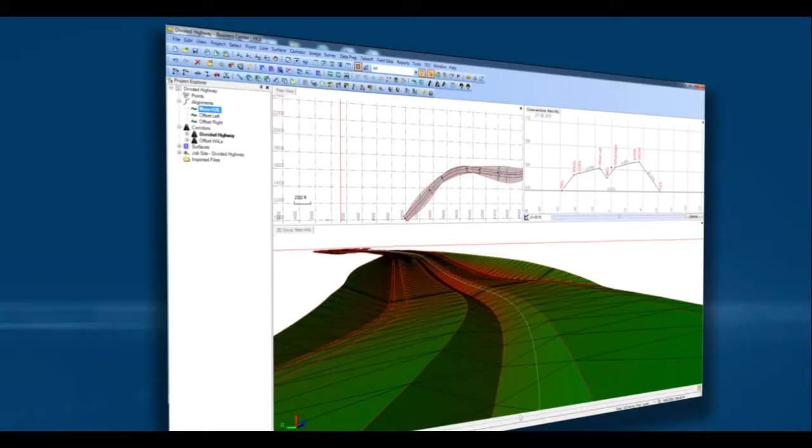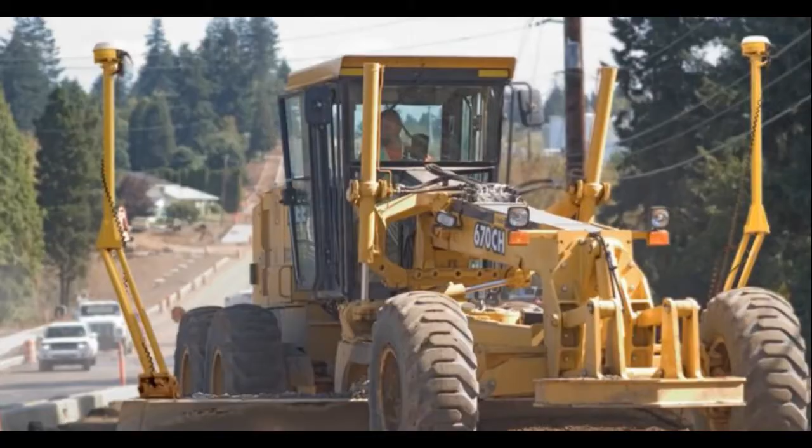A common theme we hear from companies that utilize Business Center is Business Center can enter linear data so quickly and accurately from so many different sets of data, it gives their estimators more time to figure out how to plan and then bid the job.

Business Center's Corridor Mass Haul doesn't just give a company inventory reports with accumulated material running down the alignment and mass haul diagrams that show where the balance points are along the alignment. Business Center greatly expands your bidding and project planning several steps further by giving you the capability to designate haul roads with costs, waste and borrow sites with costs and capacities.

Also, as many user-defined haul ranges for different types of equipment that can be reported by cut and fill zones by machine's haul range in Excel. Business Center gives you the ability to insert barriers along the alignment that can't be crossed when hauling. Finally, stunning visualization tools such as color-coded haul ranges by machines displayed logically in Google Earth.

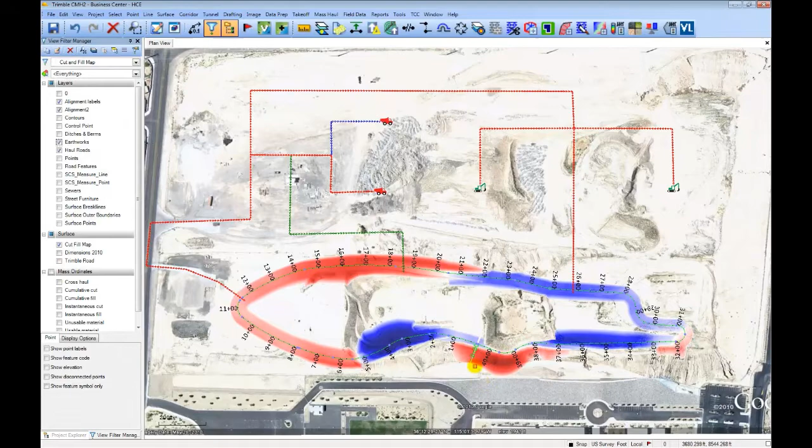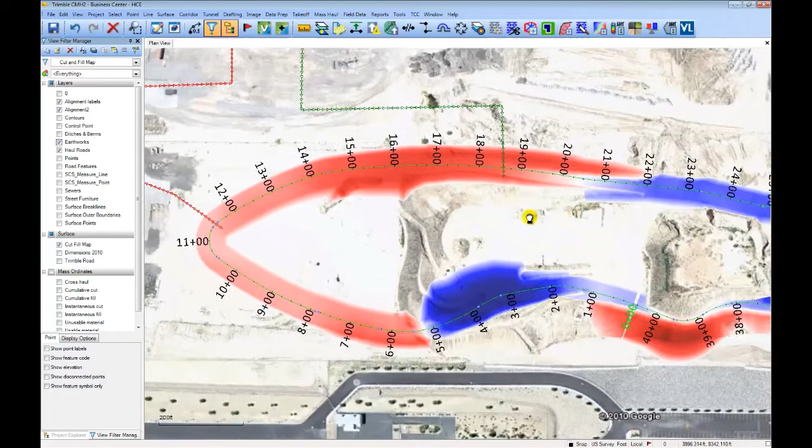Many of you will visit this project at Trimble Dimensions in Las Vegas, Nevada. Displaying the surface-based cut and fill map, you can see that the project starts off with cut on one side and fill on the other. As we move down the alignment, we start to run into all fill at Station 1 and fill all the way to Station 5. Then we transition to cut and need to fill again around Station 21.

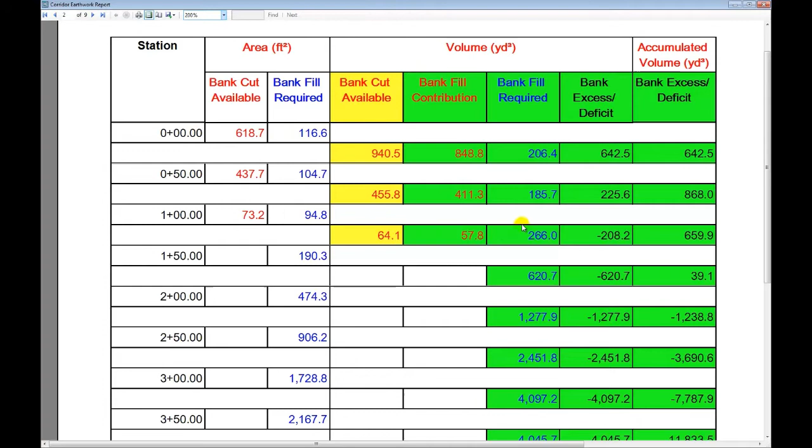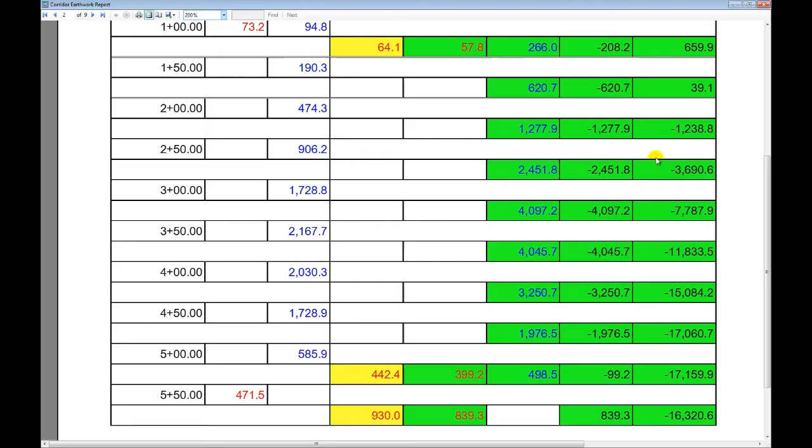If we run the Corridor Earthwork report, we should see just that. From the start to Station 1, we have both cut and fill. Station 1 plus 50 until 4 plus 50 is all fill. Looking at the accumulated material to the right, you should be able to picture what the mass haul diagram might look like. Next, let's take a look at the numbers visually by generating the mass haul diagram.

We are looking at the alignment running horizontally across the screen and the quantity of material vertically. The red line is the cumulative volume of cut and the blue the fill as we go down the alignment. From the cut and fill map, the diagram verifies that we start off with both cut and fill and quickly run into all fill. See how the blue line jumps straight up and the cut line stays flat?

The green line is the aggregate of the cut and fill. If the green line is below the alignment, we are short material. When it intersects the alignment, that is where we have a balance. You notice the aggregate line stops abruptly right here at Station 22. The symbol means we have a barrier, which happens to be a river, so no more material can cross at this station. So what we need to do is haul around the barrier using haul roads.

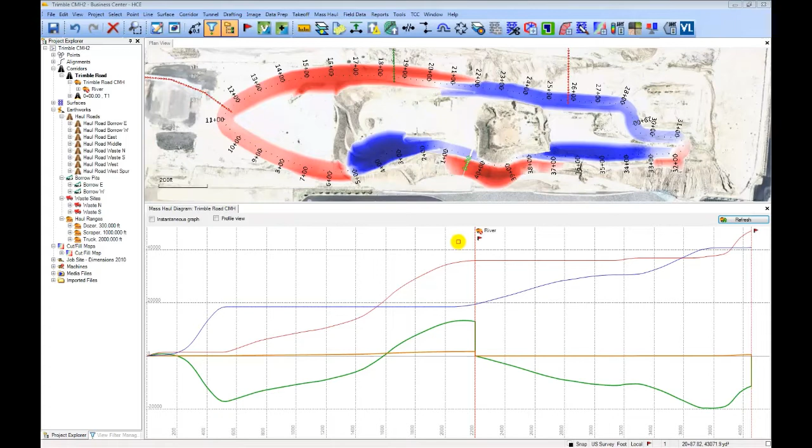This is where an aerial image of the project's location comes in. On the other side of the barrier, we are short material. So our job is to find borrow pits and determine which ones or one is the most economical to bring material from. So what we have done is draw in haul roads using the Google Earth image as our backdrop. If you are fortunate enough to have roads in an electronic format, you could simply convert them to haul roads.

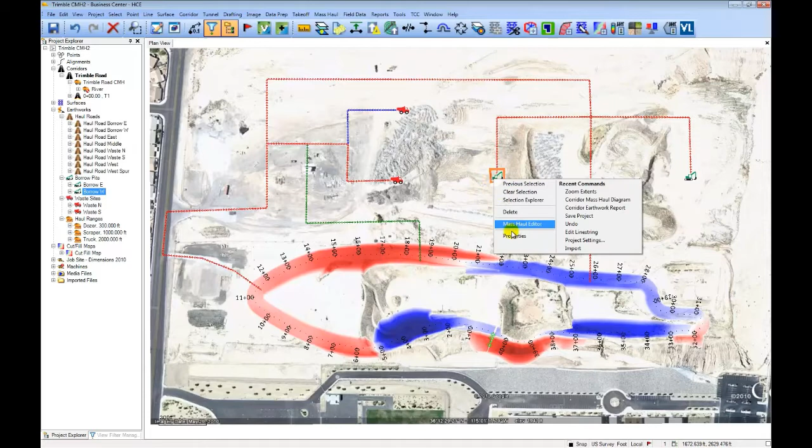We name the haul roads and put in a cost to haul material down the road. This is something you're probably already doing in your current bidding and planning methodology. Business Center just automates this process for you. Then, we determine where we can put an earthwork site. An earthwork site is simply a waste or a borrow pit. You visually see red dump trucks for waste and green excavators for borrow sites. We figure a cost that is associated with the earthwork sites and the capacity that we could dump or borrow.

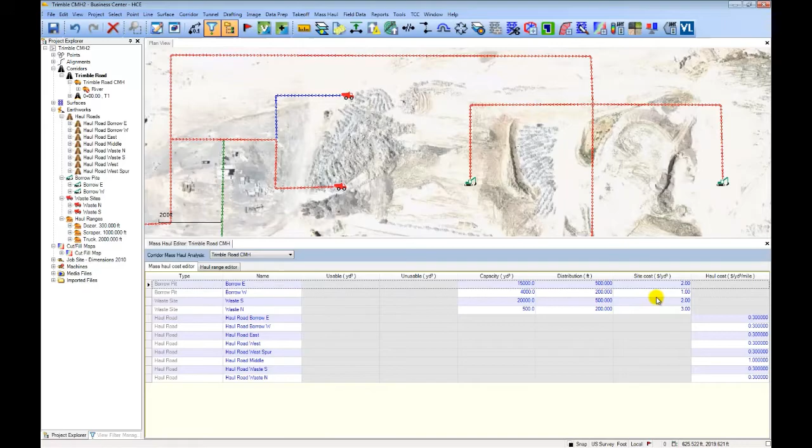As I mentioned earlier, Business Center can enter the data so quickly you and your team can spend more time doing what I'm showing you here. For a job like this one, there may be more than several places to borrow and dump material. So you and your team can locate all potential scenarios, put an estimated cost associated to them, and let Business Center determine the most efficient and cost-effective way to balance and build the job. From the Mass Haul Cost Editor, you can change assumptions on the haul roads and earthwork sites to quickly see the outcome. Back to the mass haul diagram now.

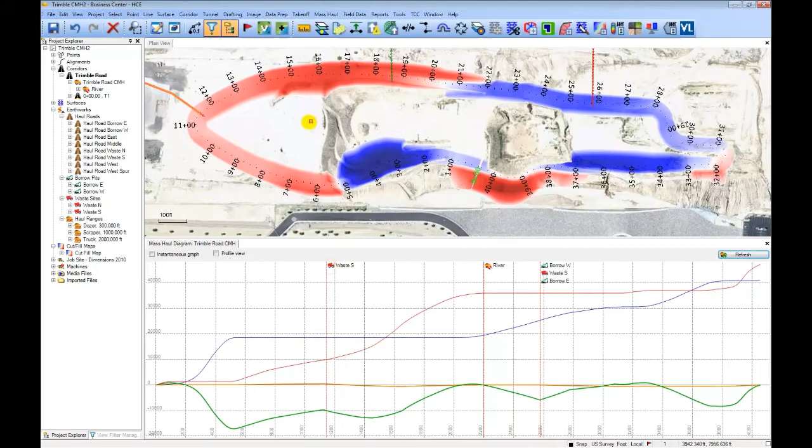I simply hit the refresh button to see how Business Center optimized the job. Because of the barrier, we were long material. Since we located proposed waste sites, we could see Business Center determined it was more cost-effective to waste material at this location than haul it around using the haul roads. You could see from the green aggregate line that we have two areas that balance on this side of the river. If we click on the red dump truck at the top of the mass haul diagram, we can graphically see in the plan view where the material is being hauled to.

On the other side of the river, we could see we have 1, 2, 3 balances. What did Business Center do to determine this? We can see that we were using 2 of the borrow pits to make the site balance. Really nice to see graphically on screen when we are planning on how to bid and build the job. We aren't quite done yet.

Now that we have balanced the job, what types of equipment are we going to need to build the job? Business Center allows you and your team to put in as many haul ranges as you need. For this project, we estimated a dozer could push up to 300 feet, a scraper up to 1,000, and an off-road truck can haul up to 2,000 feet.

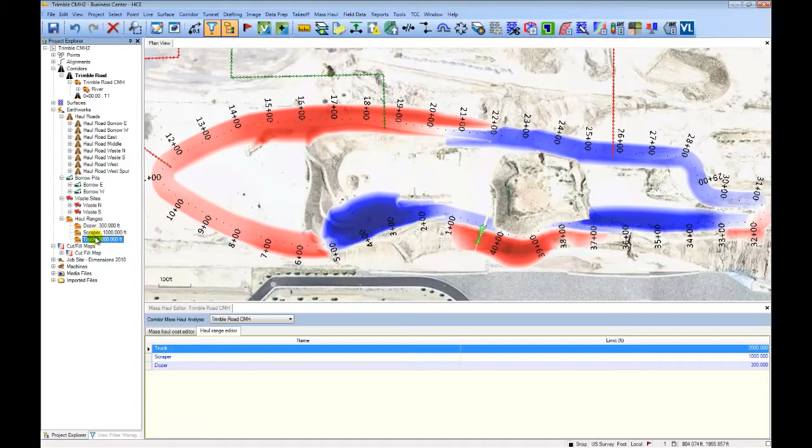If it is a really long project, you might want to know truck hauls from 5,000 to 10,000 feet, for instance. Once again, the Haul Range Editor lets you quickly change your ranges to see how it affects the mass haul diagram. Once we run Business Center's balance line report, a couple of things happen.

First, you notice how the cut and fill map changed. Now, it is your mass haul diagram graphically displayed in the plan view. Red for cut stations, and blue for fill stations. Second, in the mass haul diagram, we see graphically the equipment needed in each balance.

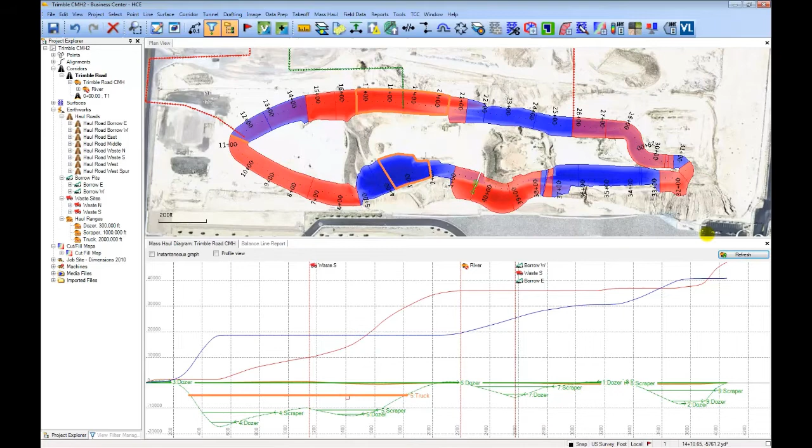If we click on this truck haul, we see graphically from where the material is being cut in the plan view to where the material is being hauled. If we look at the truck's properties, we could see the cut and fill station ranges, the average distance of 1,515 feet, and the amount of material, 9,723 yards.

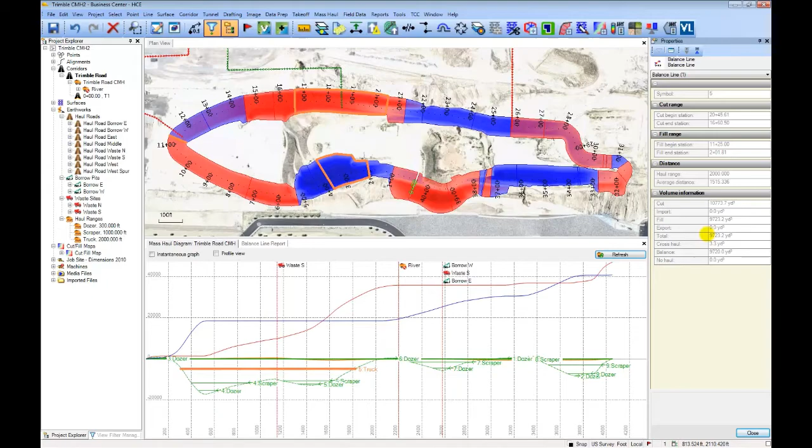Next, we will show you all of the information for all of the hauls by equipment in the balance line report in Excel. In the balance line report in Excel, we see all 9 balances. In the balances, we see the range of cut and fill stations, and then broken down for the type of equipment needed inside the ranges.

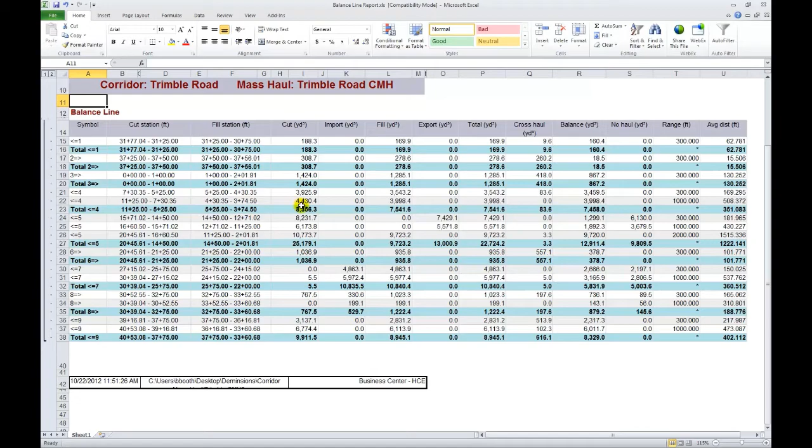In balance 4, we see that we are cutting 3,926 yards and filling 3,543 yards between these stations. 83 yards is being cross-hauled from one side to the other. Some people call this in-station dirt. The average haul for this dozer is 169 feet. The scraper is moving 4,430 yards at an average of 508 feet.

The last report we will run before reviewing the job in Google Earth is the Corridor Mass Haul Report. Once again in Excel, the Corridor Mass Haul Report breaks the job down by source and destination. Source being the cut and borrow operations, and the destination being the fill and waste operations.

For the source, we are cutting 47,178 yards and borrowing from the pits 11,365 yards. The haul cost to get it from the pit costs this, and to move the material on site is this, for a total of $19,603. We are filling 40,942 yards on site and wasting 15,241 yards.

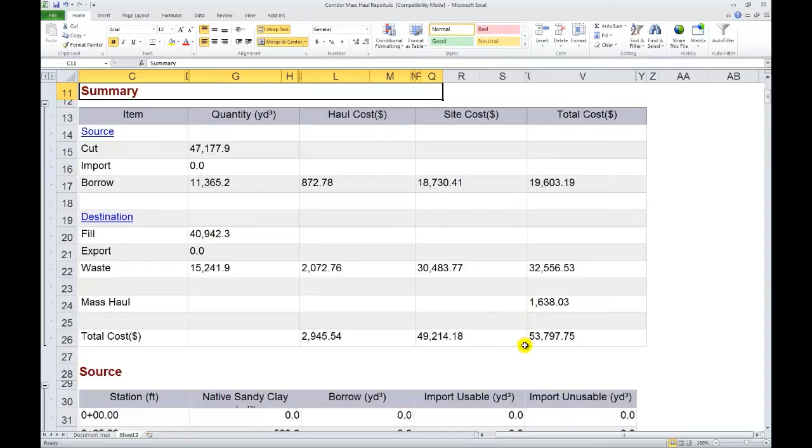Here's the haul cost and site costs for a total of $32,556. The cost to move the material in the mass haul is this, for a grand total of $53,797. If you aren't already using Google Earth as a tool for your estimating and planning, I think you will start after what I'm about to show you.

Here is the project at our Trimble Dimensions site in Las Vegas, Nevada. You could see the mass haul diagram graphically in Google Earth, just like you did in the plan view in Business Center. Running down the left side in Google Earth's version of Project Explorer, you could see all the different hauls by equipment from Business Center's balance line report.

Earlier, when explaining the balance line report in Excel, I read out the numbers in balance number 4. Here is balance number 4 isolated in Google Earth. Just simply leave checked what you want to isolate in Google Earth. You can clearly see the dirt that the dozer is pushing and the scraper is hauling.

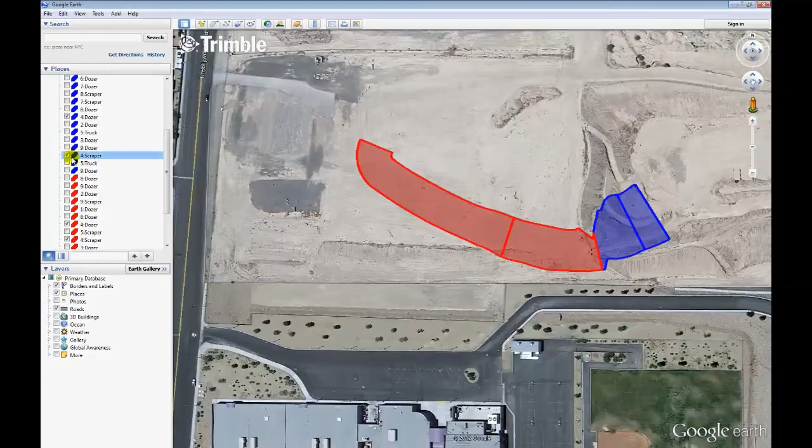I think you see the power of Business Center's Corridor Mass Haul. With your current methods, think about all the jobs that your company had bid and planned for in the past. How big of an impact do you think Business Center can bring to your company on the jobs you're going to bid and plan for in the future?